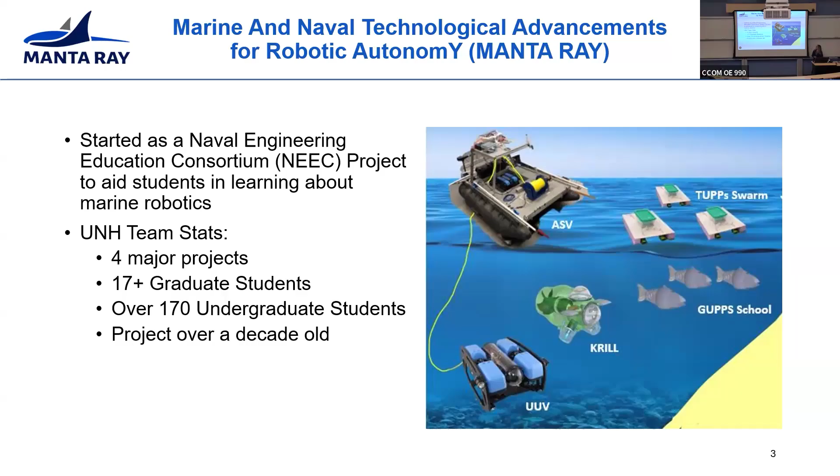And also to note, it's an interdisciplinary team. So we have students in ocean engineering, mechanical, electrical. We even have had marine biology students. So we're really getting an all hands effort on this research, which I will get a little bit further into on some later slides.

But MANTA RAY is also not the only group that Professor May Thein runs. She also oversees the Advanced Controls Lab, or ACL, who we occasionally collaborate with, where MANTA RAY focuses more on marine robotics. So you have underwater robotics, surface robotics. The ACL then oversees your

ground, air, space robotics. And Professor Thein's overall dream is to have friendly Skynet, which I always laugh about because Skynet's usually the bad guy, but we want it to be friendly. So we want this cohesive network of all of these different robotics throughout all of these different domains. And there's a lot of graduate students conducting research to accomplish all these goals through all of these domains.

So for MANTA RAY alone, even just with our UUV research alone, you have my perception research going on, you have optical underwater communications going on with Derek's research, and also our master's student Seth. We have pitch control being looked into for the robotic fish by Maggie, or reinforcement learning research by Alex, one of our systems design PhDs.

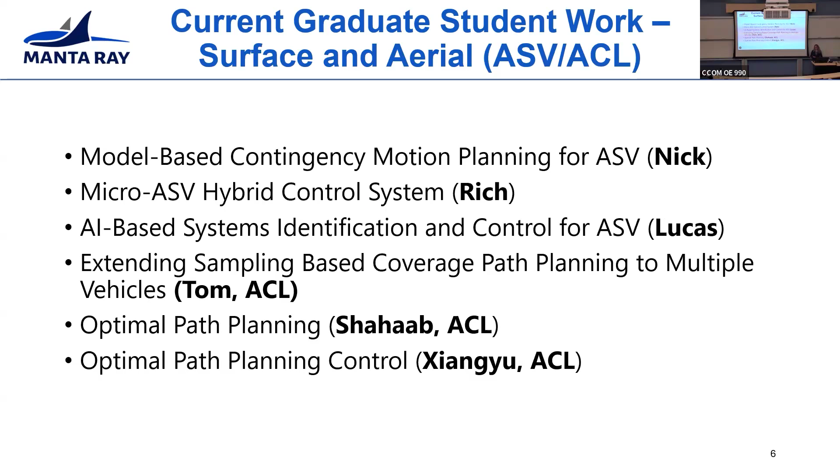And for autonomous surface vehicles, we've looked at model-based contingency motion planning, micro ASV hybrid control systems, and some AI-based systems identification, along with then going into the ACL, looking more into your path planning and controls research as well. And then for the vehicles for this research, which is where the undergrads come in because they are the ones developing these vehicles, really fine-tuning them over this whole decade-long program.

We have this network of an autonomous surface vehicle, or ASV, which is the Orca in the middle, a pontoon-style ASV, which then handles all of the different uncrewed underwater vehicles, or UUVs, in our fleet. We have the Krill, which I unfortunately won't talk much about in this presentation, but if you have questions, it's an experimental vehicle from NUWC Keyport that can be tethered to the ASV.

We have our Blue Robotics BlueROVs, specifically heavy configurations, which can be run from the Orca ASV, along with our robotic fish. So we have this network of vehicles to then apply our research to, and for this whole presentation, we're going to focus on this perception research.

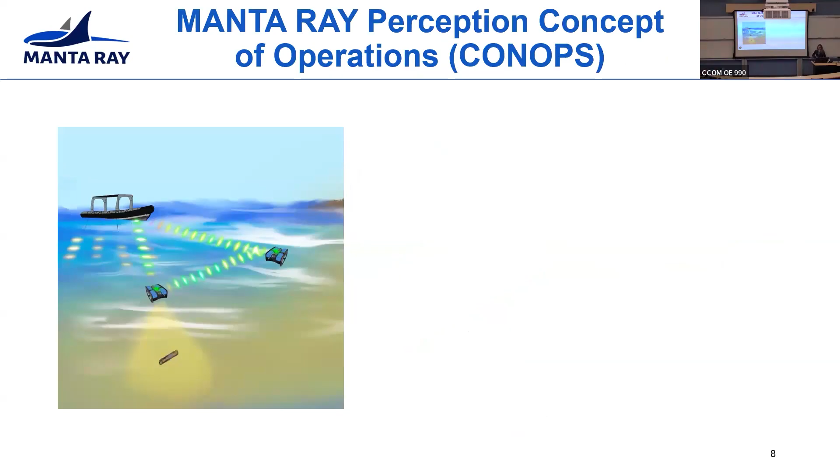So while my research is looking at developing the algorithms for perception, Maggie's GUPPS research was looking at a vehicle to deploy that perception, and Derek's communications research is looking to communicate that. So our general concept of operations here is to deploy all of these UUVs from some sort of central location

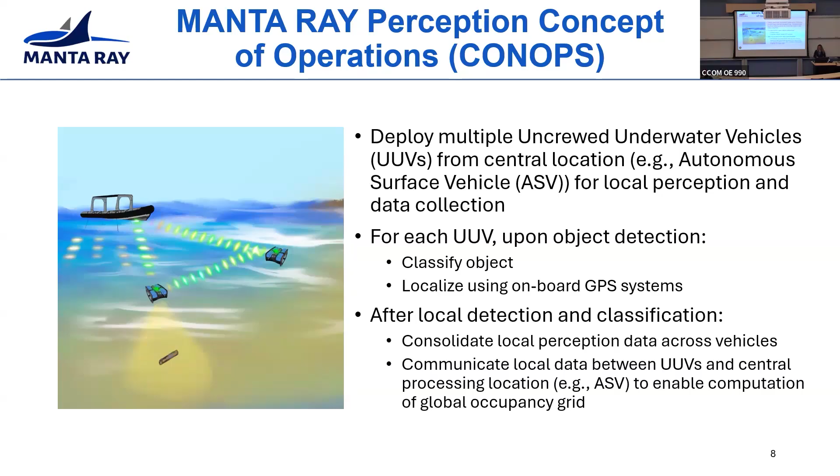So I'm just going to now dive right into that research with GUPPS, which, like I said, this was Margaret, or we all call Margaret Maggie as well, and I think most of you in this room know Maggie, who finished her thesis at the end of last semester, which was MS in Ocean Engineering, where she was focusing on the pitch control for our GUPPS robot.

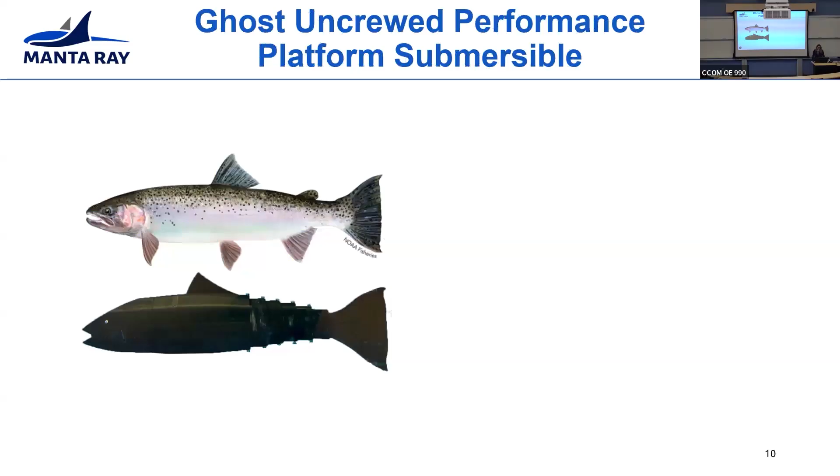So GUPPS itself is a robotic fish based off the steelhead trout. We chose steelheads to model it off of because of the Aquafort program here at UNH, where we have sustainable aquaculture research happening right off the coast of New Castle. So what a good motivation to design this robotic fish on. And we've been printing it in-house using PETG and TPU filaments. So PETG is the majority of the fish, where the TPU is the caudal fin, or the end of the tail. So it's a little bit more flexible.

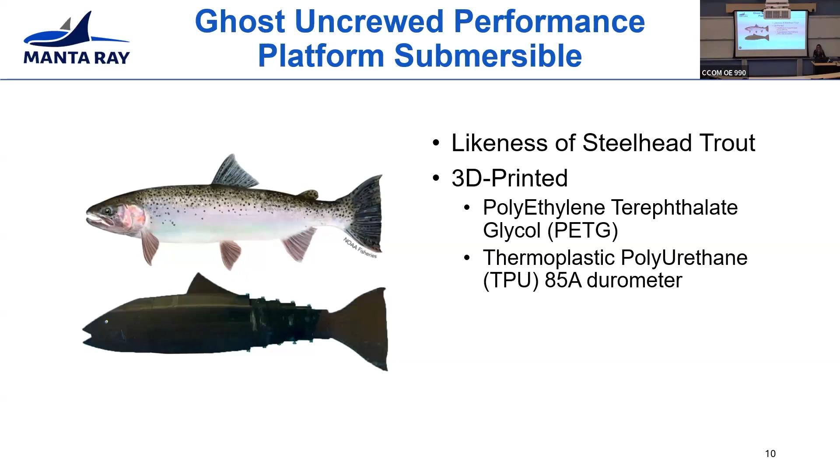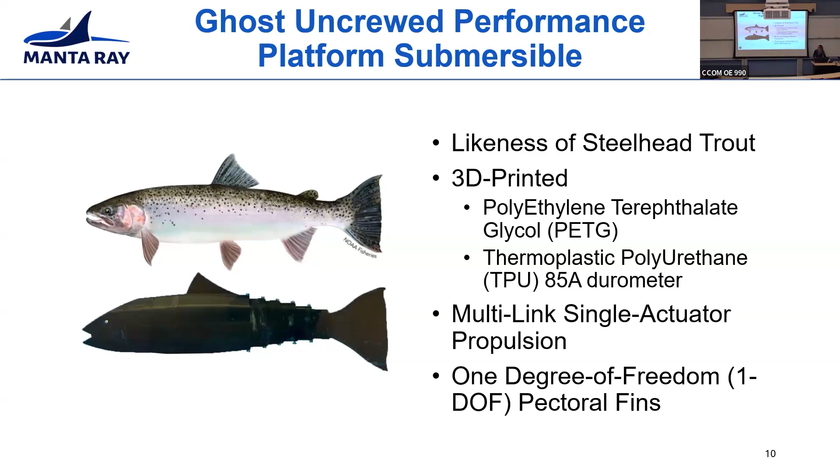It's using a multi-link single actuator propulsion method, and it has 1 degree of freedom, or 1 DOF, for its pectoral fins towards the front of the fish. And GUPPS will be used as a dynamic perception array. So we're looking at using several GUPPS in a multi-node configuration, with each having a perception sensor package on board. So that package would include perception sensors like your cameras and sonars, and then your ambient sensors as well, looking at data points like temperature and salinity.

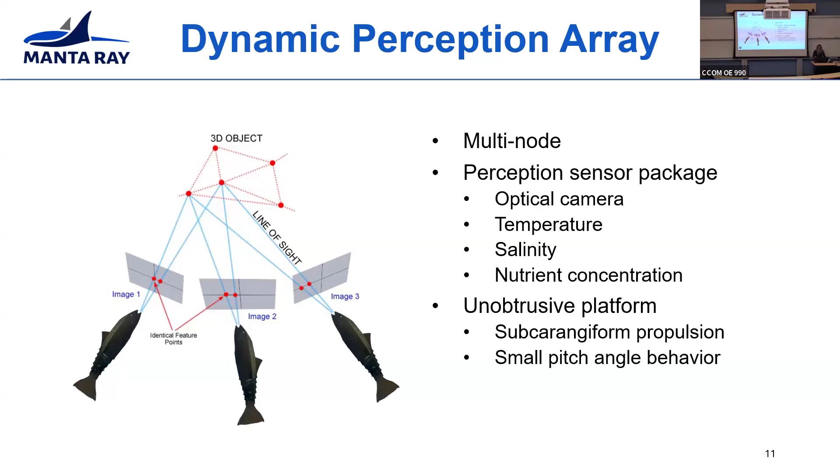And it's meant to be unobtrusive. So we're modeling GUPPS after the steelhead trout, so it blends in better with its surrounding environment, using similar propulsion to the steelhead, so that subcarangiform propulsion with that small pitch angle behavior. And subcarangiform is a fun word to say, and that's really looking at the biological part of GUPPS. So that's where a lot of the biology research comes in, and subcarangiform is just the class of fish we're looking at. So that's including trout.

And you can see, because of how the servo is configured within the body of GUPPS, so the servo itself is kind of mounted at the middle of the body, and it's a rod-driven system where the rod is connected through this piece. We can get this kind of sinusoidal motion, which is mimicking the subcarangiform propulsion we'll see with the steelhead trouts.

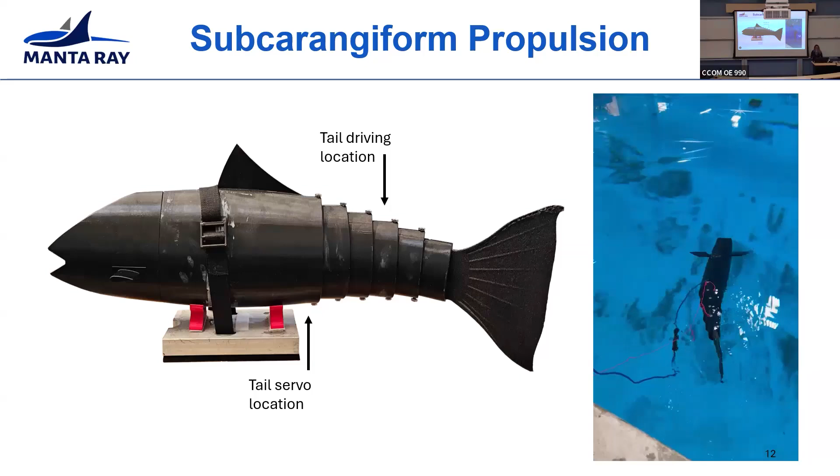For the pectoral fin, the pectoral fin started not very biomimetic, where it was based off of a NACA airfoil, which was very lovely for simulation modeling, since there is a lot of research on NACA airfoils. Unfortunately, because of the size of the fin, even though it was similar to what you see ratio-wise in nature, it was not forcing the body of GUPPS down as much. So over time, the design became a lot larger, but also still became more biomimetic in a way where we were modeling closer to a fin that you would see on a fish in the wild, especially with the ray design on it. So it is just interesting to see how we go from a NACA airfoil all the way to this more biomimetic design at the end.

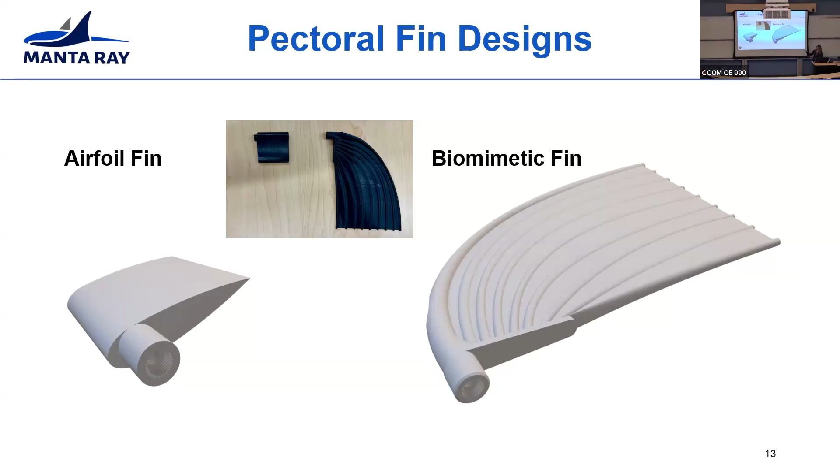And then all together with the pectoral fin inputs with how that tail is propelling GUPPS throughout the water, then we can look at how the pitch of the fish itself can be adjusted, which is what Maggie was looking at mainly, was that change in the angle of attack of the pectoral fins, or AOA, and how it would change that body pitch angle.

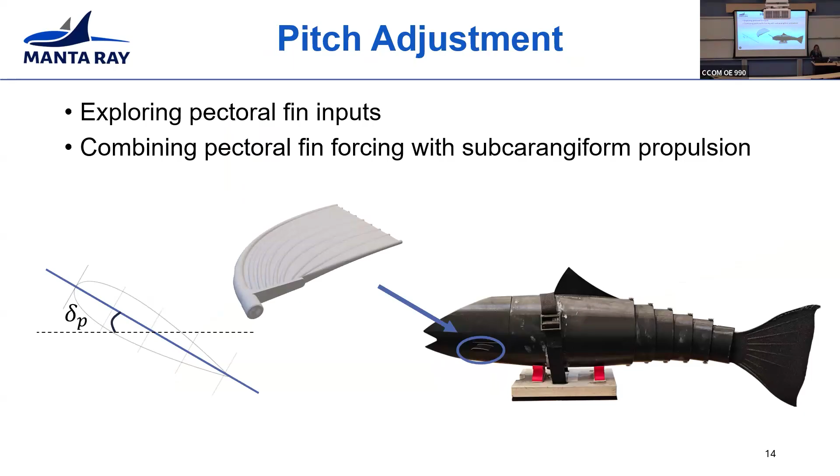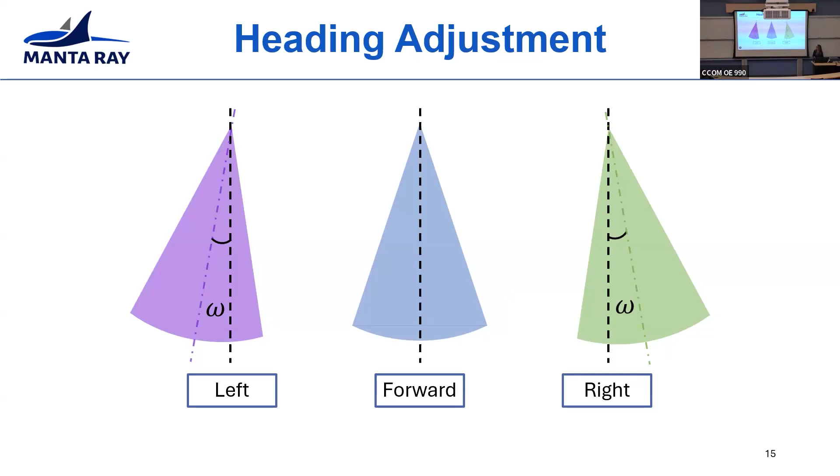Also for the heading of the fish, the yaw could be adjusted by changing the axis of the caudal fin. So the line of travel for the fin itself is oscillating, and it creates a net zero force propulsion. So the flick of the tail does one cycle, and that cancels out with forward movement. To change that yaw, you have to change the center of axis for the caudal fin, which is at omega. For this research, we were just looking at forward propulsion, but future studies could definitely look at then changing that yaw angle as well.

For the actual guts of the fish, everything was packed in a Blue Robotics pressure vessel housing, where for the sensor systems on board, the inertial measurement unit being used was a Berry IMU 6 degree of freedom sensor, and then a dual pressure sensor configuration, which you can see in this image here, was also implemented by putting two Blue Robotics Bar30 sensors, one on each side of the pressure vessel.

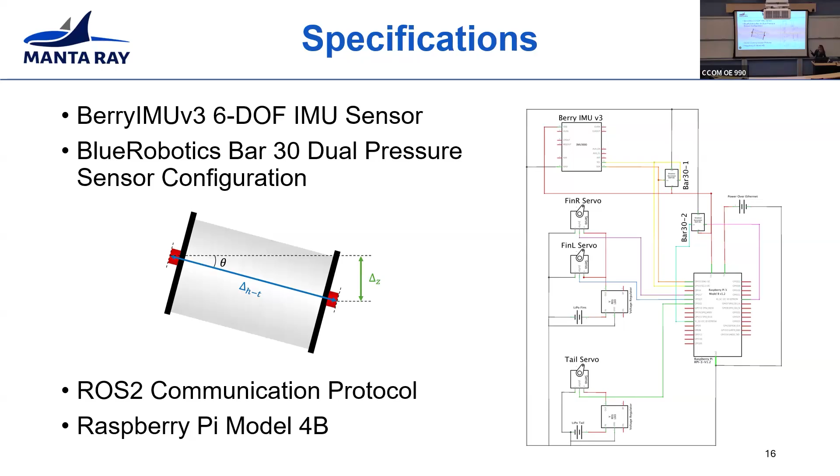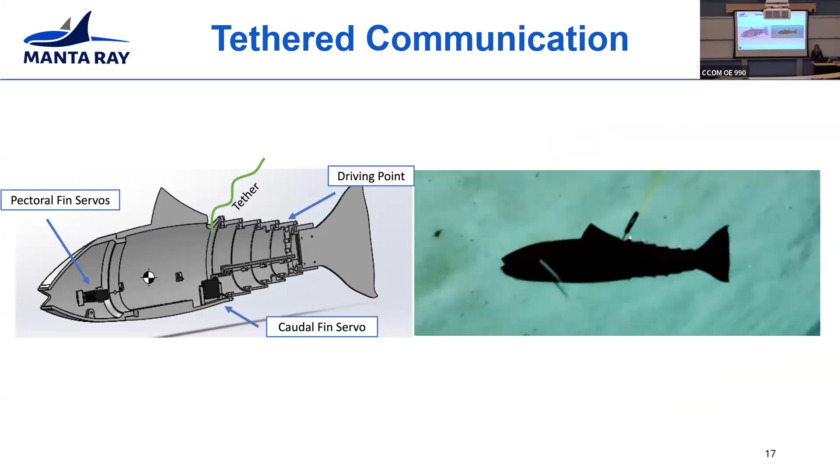The actual communications for GUPPS were handled using the Robot Operating System 2, or ROS2, all handled on a Raspberry Pi Model 4B with the electronics diagram as you can see here. Communications itself were done via tether to a shore station, so a laptop on shore somewhere. So we were able to have user inputs go into GUPPS via a graphical user interface, or GUI, to real-time control the different angle adjustments for the pectoral fins, for the caudal fins, and so on.

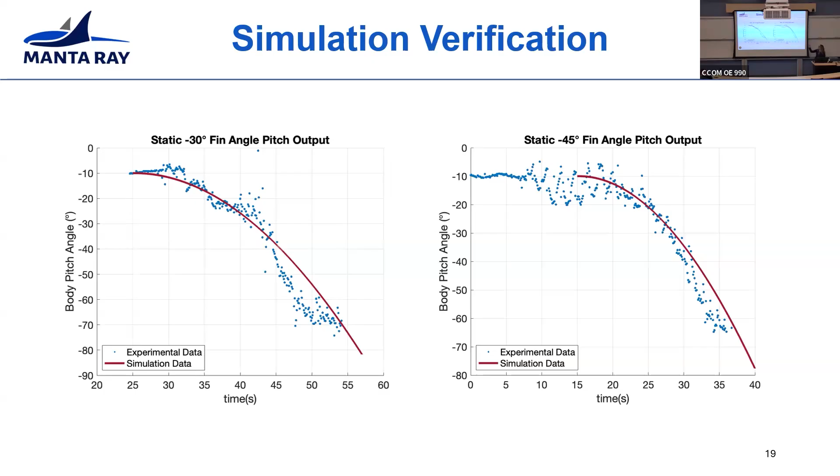These were the simulation versus experimental results for static pectoral fin testing, which was published in her IEEE OCEANS Brest publication, where the fins for GUPPS were statically set at two different pitch angles, here -30 and -45 degrees. And you're able to see how the body pitch angle of GUPPS lines up pretty well with what was simulated using that Simulink model.

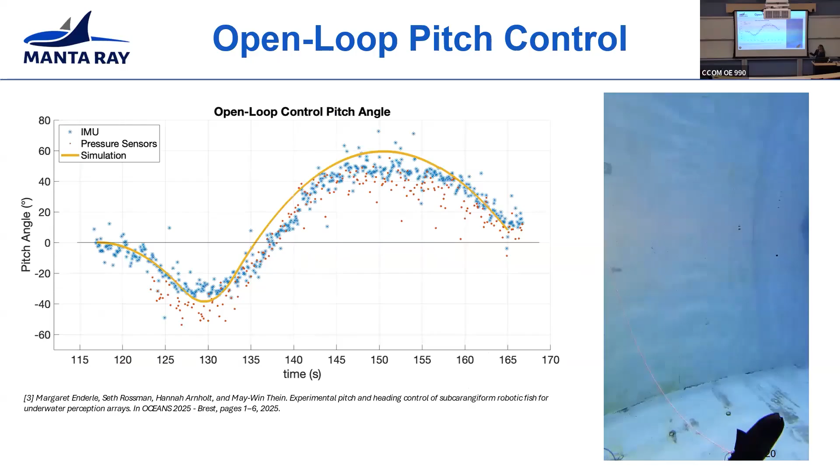And then also, Maggie was able to verify an open loop pitch control, also presented in that Brest paper, where we got the simulation output and we're able to compare it against the actual experimental. And you can see these results were from this test here in the video, where GUPPS is descending, then ascending, and then descending again. And it's cool because you can actually see the fish kind of swimming through the water column. So I'll let you all watch this for a sec.

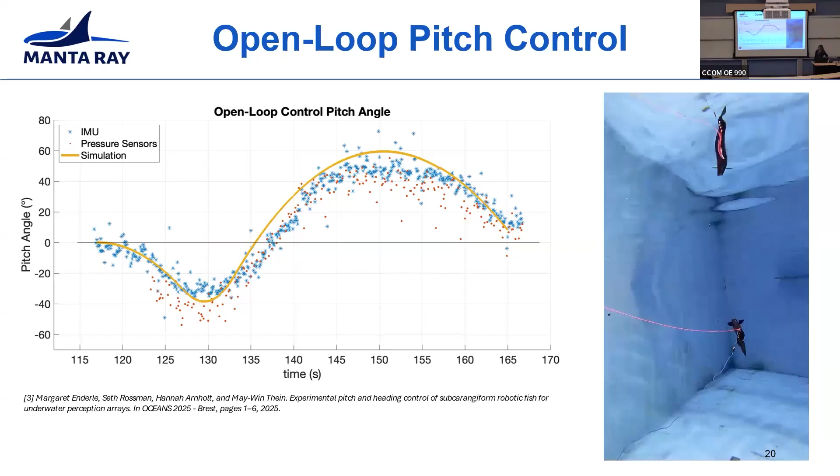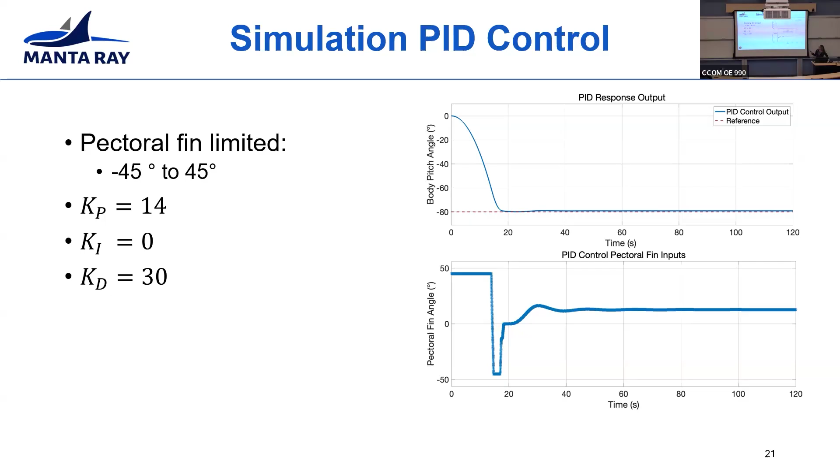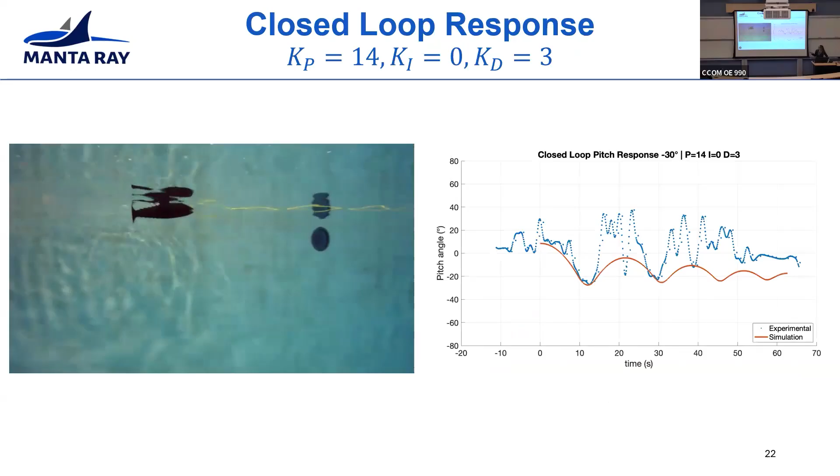The final study Maggie conducted was implementing a PID controller on board GUPPS. So she was able to simulate the controller itself and then experimentally validate again. These were the inputs that were used, along with the pectoral fins limited between -45 to 45 degrees. This was the controller pectoral fin input with the response output as seen here. And again, we're able to validate those simulated results with the experimental, and the video for this trial here can be seen here.

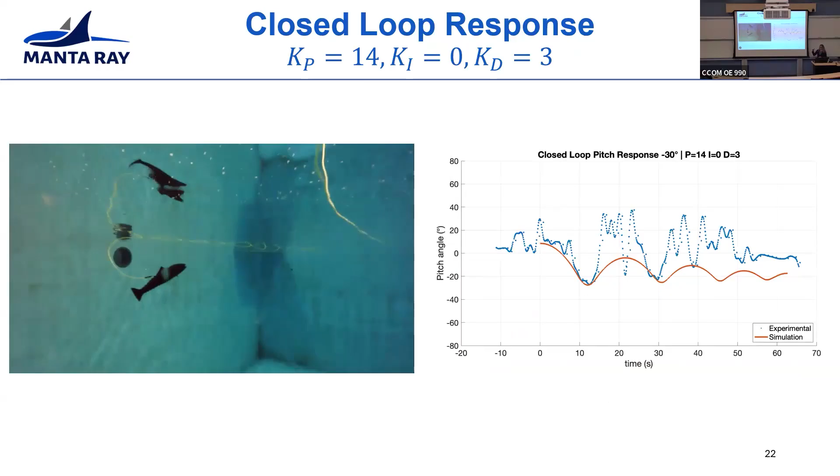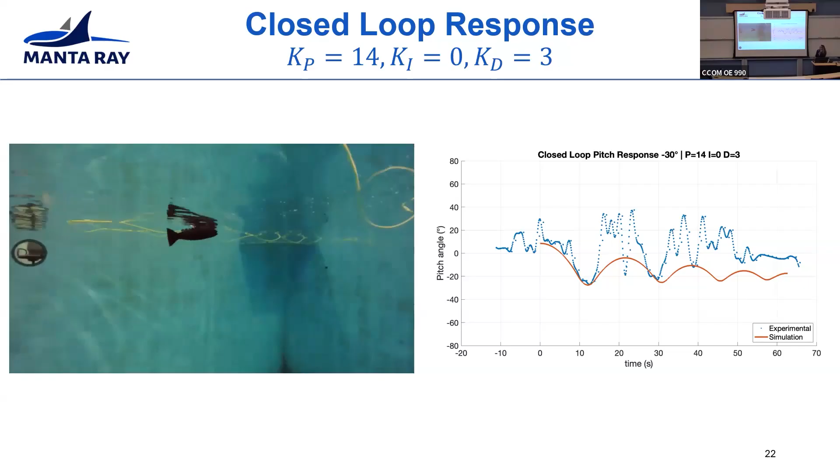And to note also, these results don't look as clean as the last ones because GUPPS starts so close to the surface. The model itself was not accounting for those surface effects, which is what explains this noise that you can see here. And Maggie discusses that a little further in her thesis. So I can also refer anyone to that if they're interested.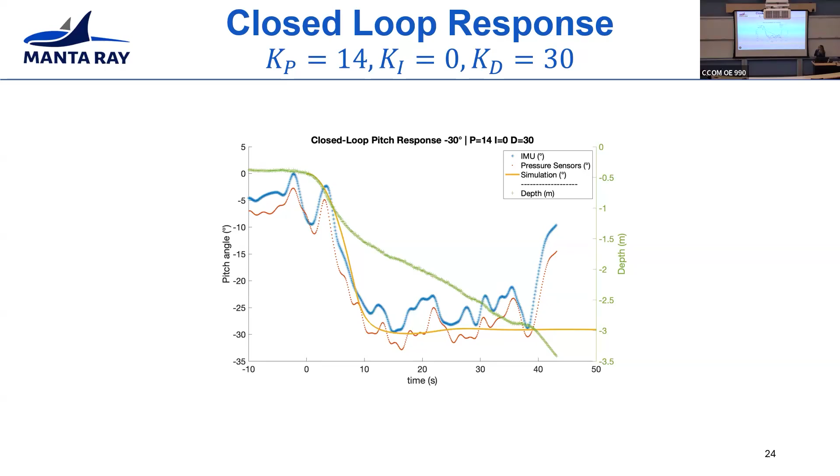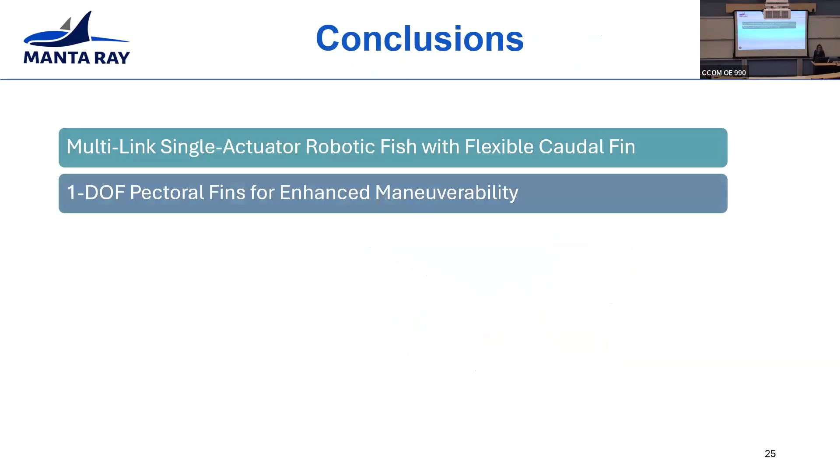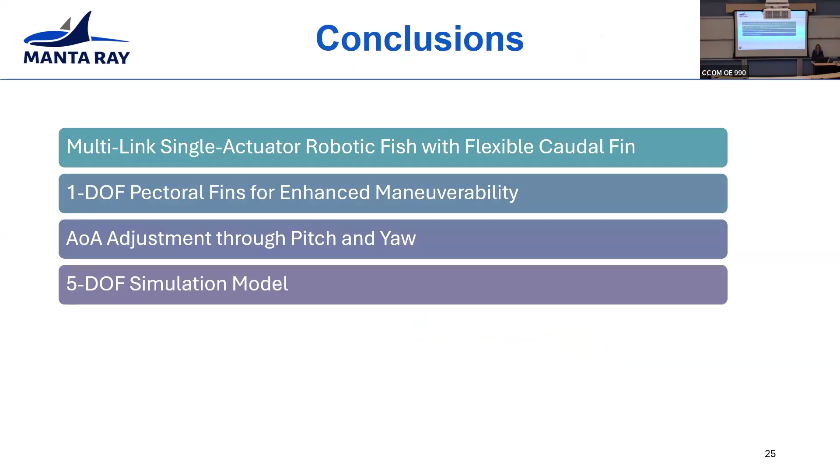So to conclude this master's research on GUPPS and hopefully frame future studies on the next slide, we've presented here this multi-link single actuator robotic fish with a flexible caudal fin with 1 degree of freedom pectoral fins for enhanced maneuverability. You have your angle of attack adjustment through pitch and yaw. Maggie developed a 5 degree of freedom simulation model using Simulink, and verified that model using static and open loop control tests, and also implemented a closed loop PID controller for her pitch control.

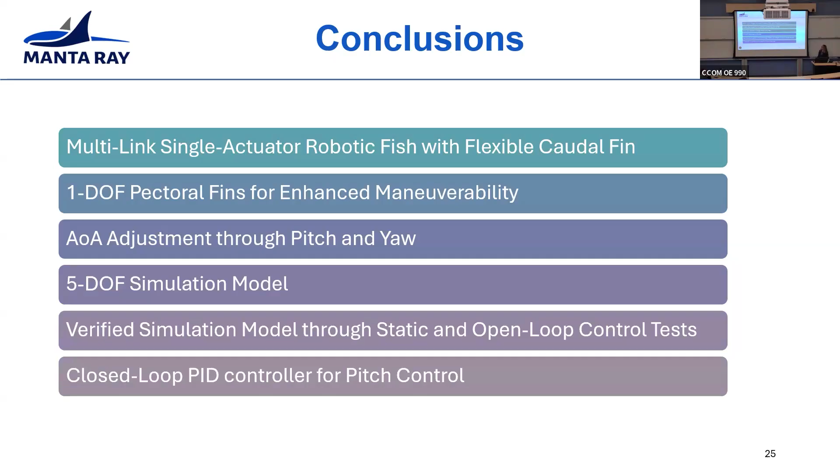So moving forward with this project, because we really don't want to see this GUPPS research lost, and it's hopefully going to be implemented for some of my research, we'd like to expand the PID controller implementation to heading.

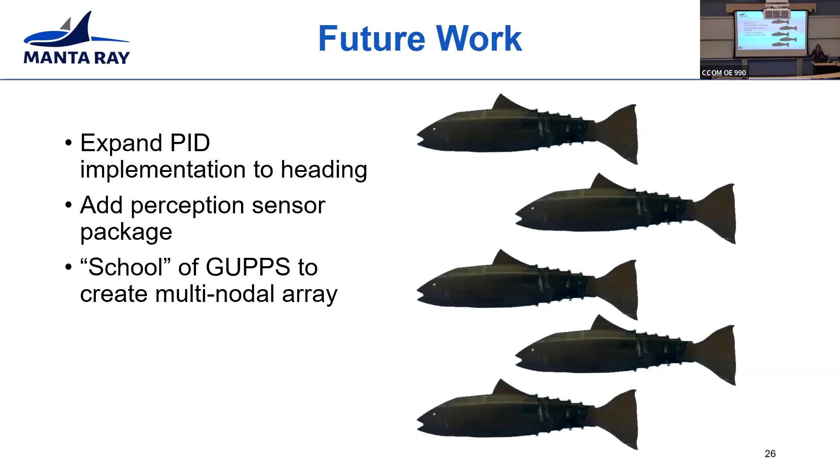Add the actual perception sensor package, as this research has mostly been looking at that control aspect of GUPPS. It's really important for the perception research to really have an understanding of the orientation of GUPPS in the water. So that's why we've spent so much time on it, but it'd also be nice to start collecting some perception data using the fish, and then also create a school of GUPPS so we can have multiple to create that dynamic perception array. And then these were a lot of Maggie's references.

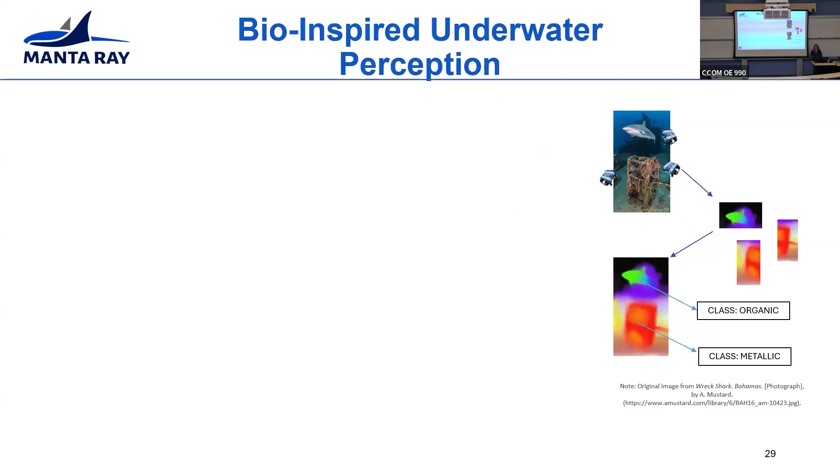So then going into now my research, which is the Marine and Naval Techniques for Integrating Sensing, or MANTIS. So why do we have these vehicles? One purpose is to collect perception data, as I've said a lot so far. So I'm focusing on bio-inspired underwater perception, using an n-dimensional approach, leveraging different sensor types. I mentioned it earlier in the GUPPS sensor package. For that, we're talking about sonar and camera. For my research, even adding on other sensors like magnetics, and also leveraging those different viewpoints.

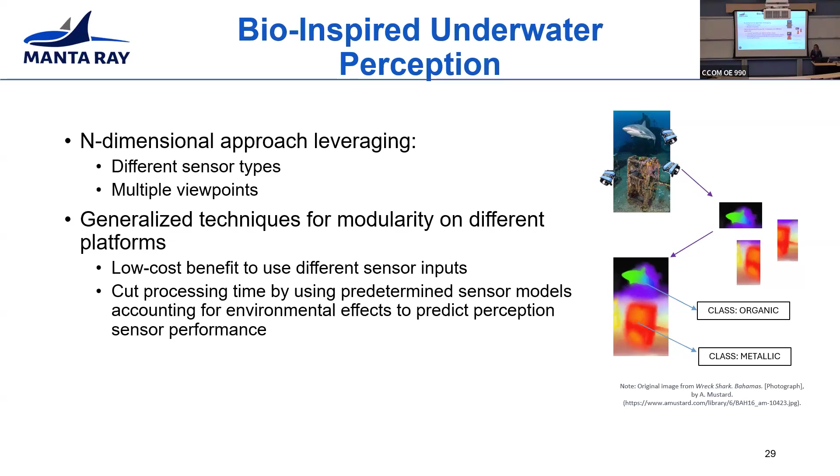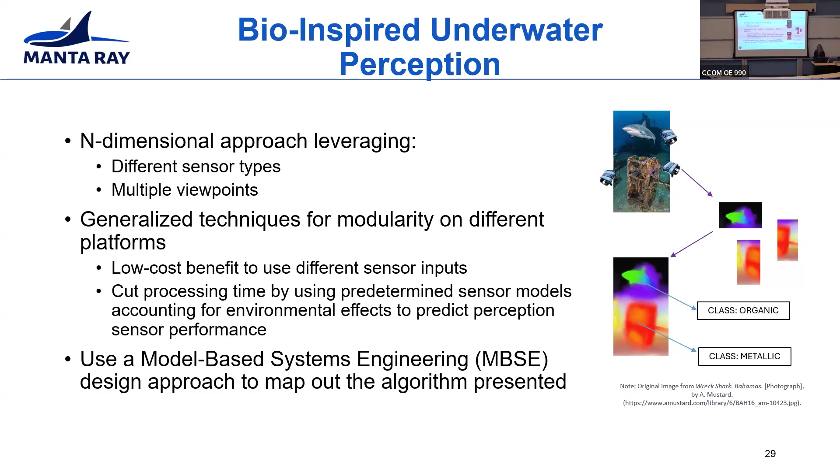And trying to generalize these techniques for modularity, so you can help with cost. So you're looking at putting this on different vehicle types. You're looking at using different sensor types, even different redundant sensor types. So using a low-cost sensor maybe in one package versus a high-cost sensor. And then also cut processing by having an understanding of how your sensors work in different environments, so you have all of these predetermined models that you can implement later on, hopefully, with the end result, cutting processing time. And then I'm also using a model-based systems engineering approach to map out all these different algorithms and capture them accordingly.

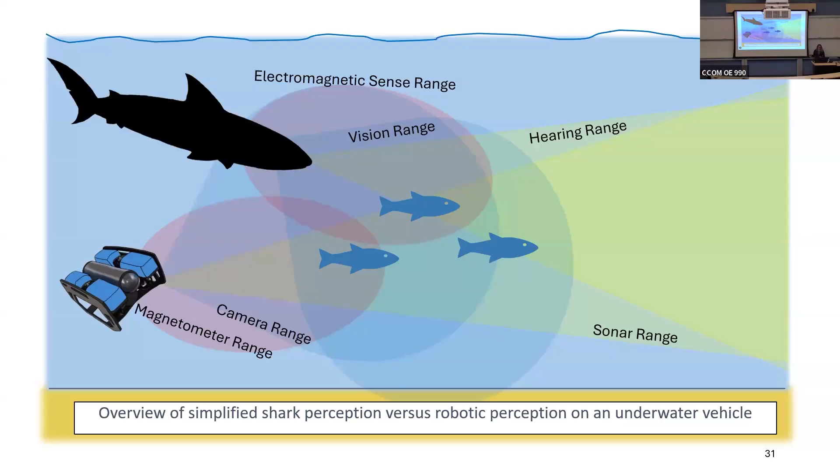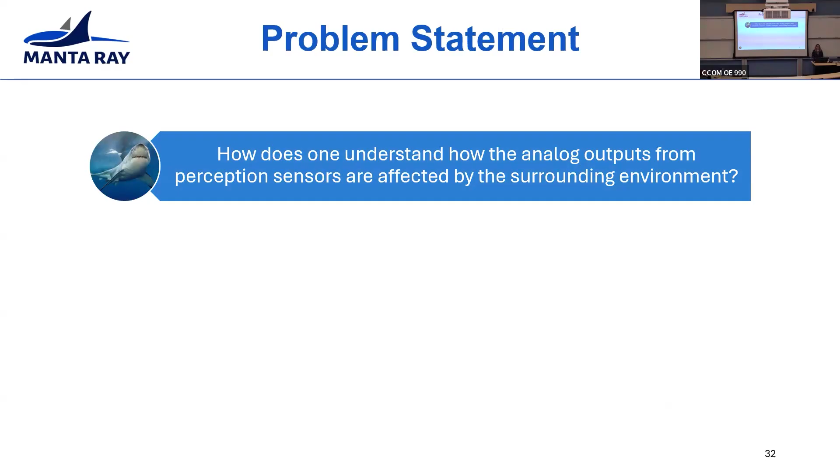So to break this down, I've isolated a couple of problem statements to really start diving into all of this. The first one is, how do we actually understand those analog outputs from our perception sensors and how they're affected by the surrounding environment? So for the shark, if it's in a really turbid environment, maybe it knows it can't trust its eyes as well because there's a lot of sediment through the water column. So maybe it will depend more on its acoustic senses or magnetic senses and so on.

And then how can we leverage these performance models to unify the data together for that object detection and classification? So when the shark's in that turbid environment, how does it say, I can't really trust my eyes, but I see a blob there, and then I'm getting this sound and this magnetic signal too. So how do I put this together and say, oh, I think that's an injured fish, I'm going to go after that.

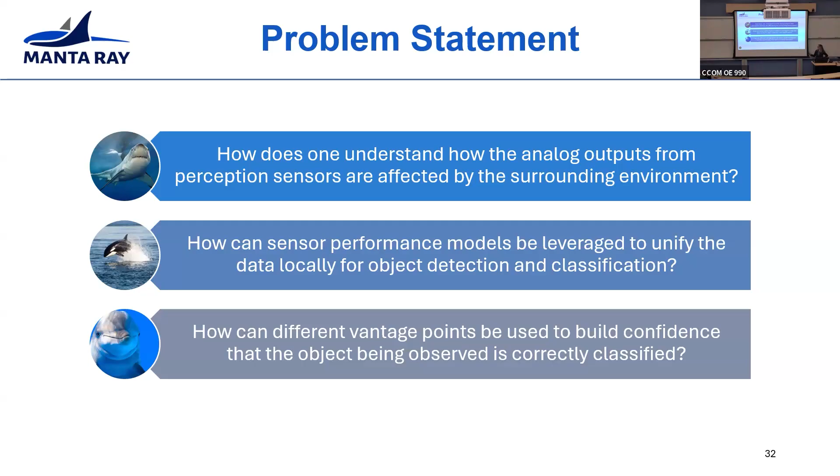And finally, how can different vantage points be used to build confidence that the object being observed is actually correctly classified? Say you have a pod of dolphins and they're all working together to hunt something. How do these dolphins communicate to say, okay, this is what we're looking for? For today, I'm going to just focus on the first two pieces of this problem statement, but this third problem statement is what I'm working on for future studies with my research.

So for the first problem statement I presented, we're looking at our sensor performance model, and this is where my standardized heuristic algorithm for reinforced calculations, or SHARC, comes in, where I've developed this algorithm to capture modeling the ambient environment around the sensor and how the different sensors behave with it. And then incorporating this into a type 2 fuzzy logic algorithm, the weighted heuristic algorithm for localized entity evaluation, for handling all of this information together. And then I'll present today an application to a real life scenario of swimmer search and rescue, which we presented at Oceans Great Lakes last fall.

So to dive right into things, for the sensor modeling, an overview of SHARC: it's a 3-phase algorithm where you first have to identify the sensors you're using, so your ambient package and your perception package. So if we're modeling a sonar, we're looking at probably a CTD package for an ambient sensor. And then assessing the performance.

So again, for that sonar, what are our predicted echo levels? And then also, how can we use those to get our probabilities of detection? So using a mixture of simulation and experimentation to get that data, and then eventually apply it. So when I modeled SHARC, it was in my publication for Oceans Halifax.

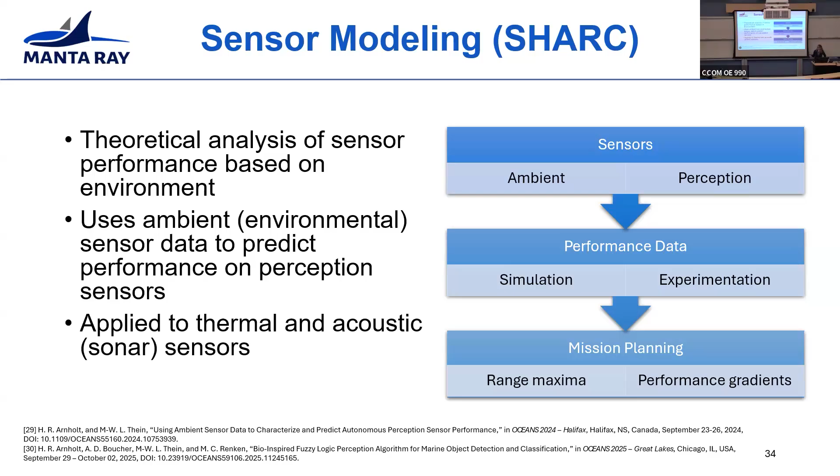But then for Oceans Great Lakes, we were looking more at implementing it into WHALEE, which I applied to not only an acoustic sensor, but a thermal one. So for the Great Lakes paper, I was looking at a Blue Robotics Ping 1D sonar along with an MLX90640 thermal camera. And we were able to model the performance data, so get those predicted outputs.

So as I said, for the sonar, we're looking at the echo level. For the thermal camera, predicting what temperature would be radiated away from the camera. And then also using those to determine our probability of detection, which were then able to be input into our WHALEE membership functions.

I'm not including the models just for time's sake, but for the sonar, it was a mix of the sonar equation as well as using Michael B. Porter's Bellhop simulation to model the transmission losses through the water column. And then for the thermal camera, I was able to use some thermodynamic relations to assess the range. So if you're interested in those, we can talk about it later on.

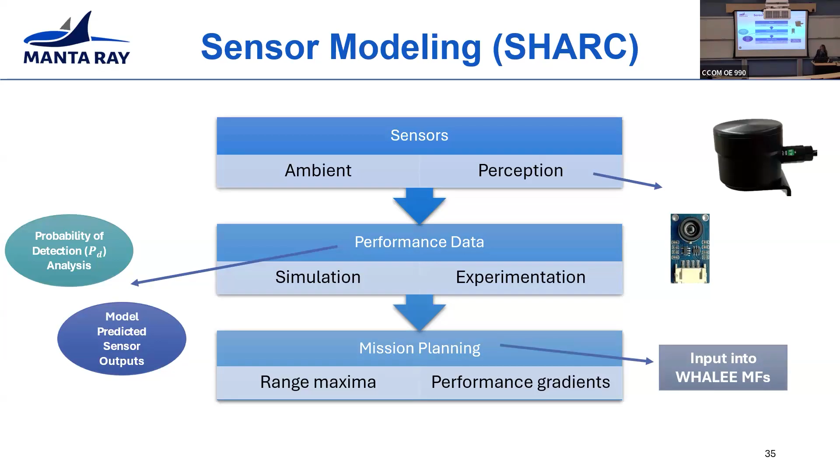But getting right into the WHALEE algorithm, which I said is a type 2 fuzzy logic algorithm, how that works is you have these membership functions, which for type 2, you have these field of uncertainty bands. So that's actually taking those probability of detections, in this case modeled from SHARC, to determine those bands. So the higher probability of detection you have, the smaller those bands get because you're more confident in your results.

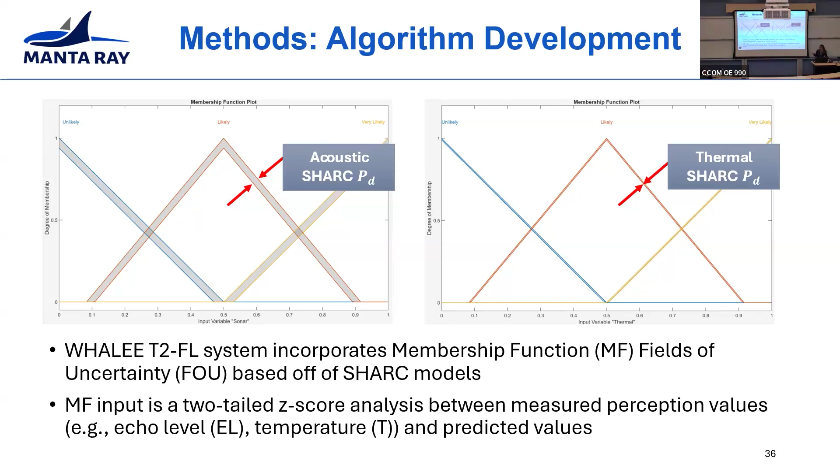But the less confident you are, the more that field of uncertainty will grow because you're just very uncertain on results. And then for the actual inputs, we're going to take those predicted values, so the predicted echo levels and temperatures, and compare them to the actual experimentally collected ones using a two-tailed z-score analysis to go into the inputs.

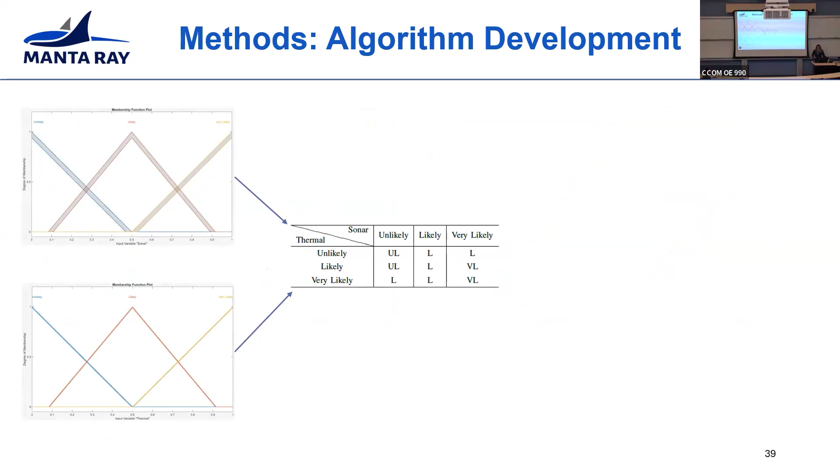where we can determine what confidence we want to use as our classifier. So here we were using a value of 0.8 or higher. If we got a crisp output of that, then we said, okay, this is our swimmer in our environment.

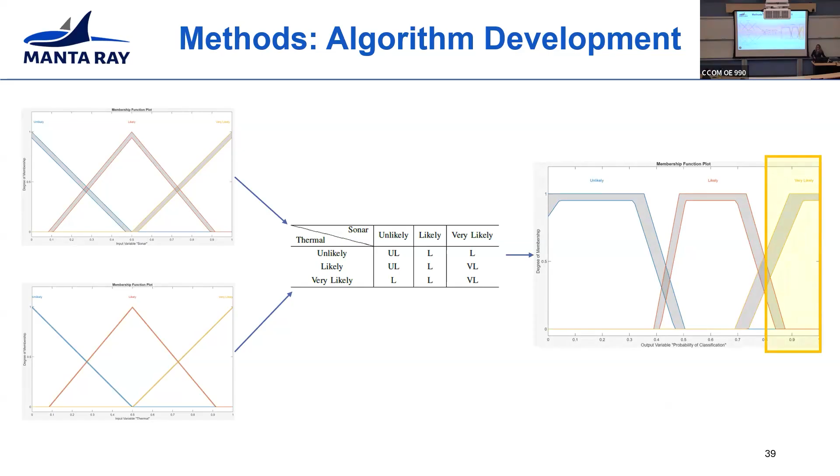Then in my research, WHALEE would be performed for every target within a frame of discernment. So one limitation of my research is that you have to assume every target you define is the only one you know in your system. And that's just for the sake of scope for my research itself.

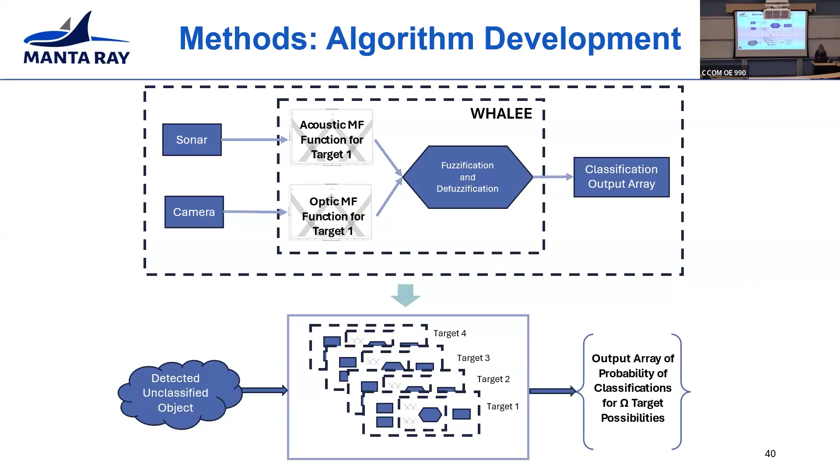In the case of the swimmer search and rescue, we were just looking at the swimmer itself and a secondary target, which I'll get into later on. And that was our whole frame of discernment. But in future research, we're looking to expand that frame.

And then for experimental validation, we used a micro uncrewed surface vehicle, or micro USV, right here in the Chase Ocean Engineering tank, outfitted with our perception sensors, so that sonar and thermal camera, paired with the complementary environmental sensors. And it was RC operated from a shore station, also using a ROS2 interface.

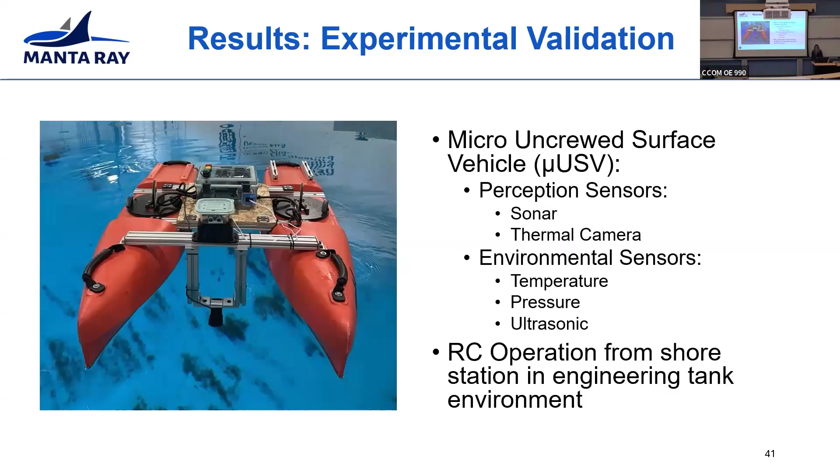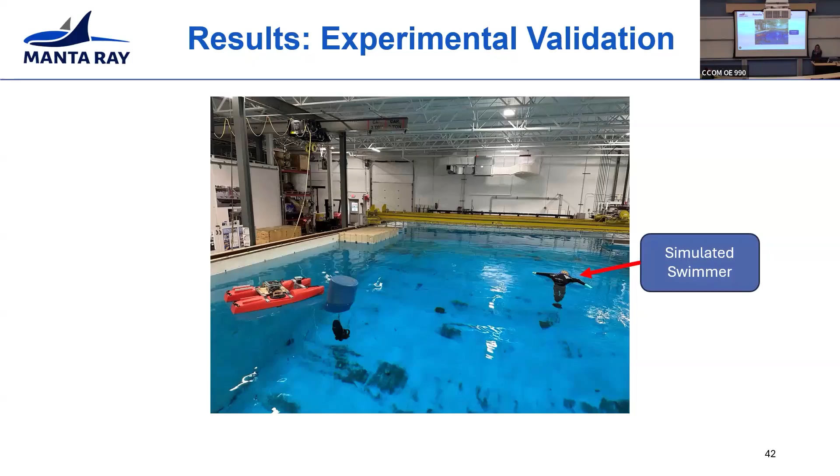And then the test itself was us driving the micro USV using a lawnmower pattern around random configurations of our targets. Our primary target here, the simulated swimmer, was a women's wetsuit filled with air-filled targets, with the head being a water polo ball with electronic hand warmers on it. And our secondary target here was just an air-filled drum, just to look for something else.

And then the results from the z-score analysis. I'd also like to note the Blue Robotics sonar, we ended up finding some challenges. We weren't able to get the actual analog decibel values from that. It gives more of a digital output, and unfortunately there isn't a way to convert from those 0 to 255 values back to decibels. So for this study, I just use a yes or no if we detected. For future studies, we've already acquired a new transducer, so we will be able to get those actual Z-score comparisons, but for the thermal, we were able to get the comparisons between our predicted temperature and our measured, which you can see here.

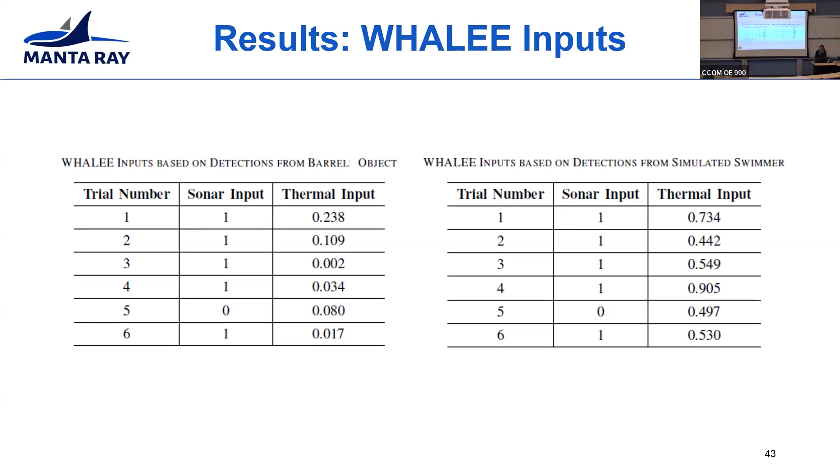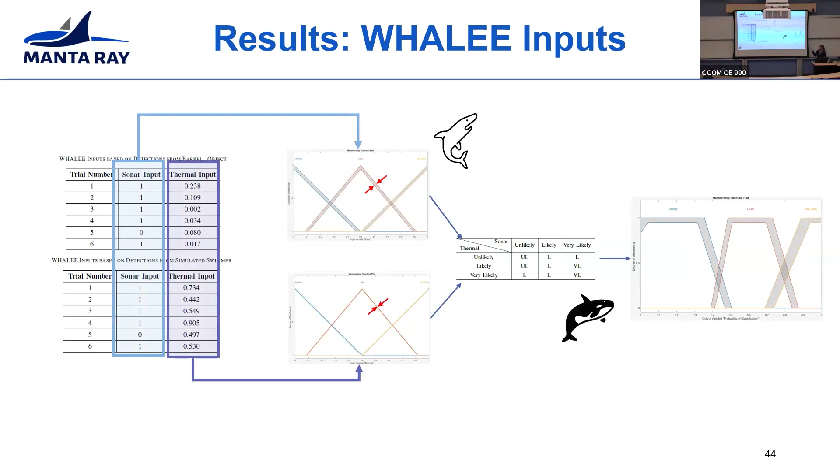And then these, again, just to remind everyone, go right into our WHALEE algorithm where the acoustic values go into our acoustic membership function, thermal goes into thermal, shark determines our fields of uncertainty, and then the rest of WHALEE runs to get our crisp output, which we can see here. So for all of the trials, we were able to detect both of the targets, so that simulated swimmer along with our secondary target. For 5 of them, we were able to also classify our swimmer using that 0.8 crisp output threshold from our defuzzification. And you can see the barrel was also detected, but did not make that threshold. So we were able to say here that that was not our swimmer.

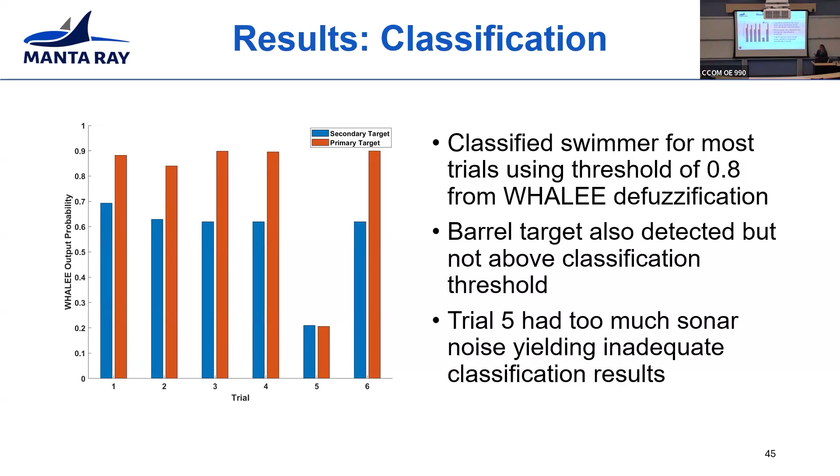Trial 5, while both targets were detected, there's too much sonar noise to actually detect it using the sonar. And because the rule set was so biased towards the sonar, even though we had adequate thermal results, we weren't able to get a detection. So that was kind of more of showing that's probably also what would happen in nature. If you weren't confident in one of your senses, then maybe you wouldn't get your full classification too.

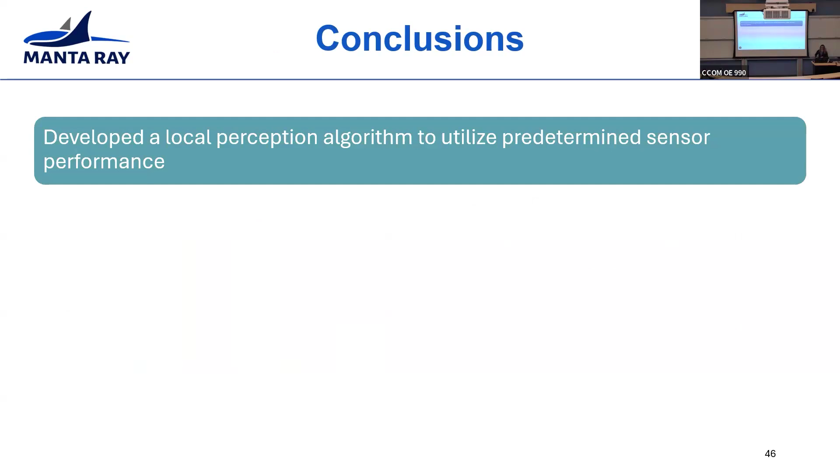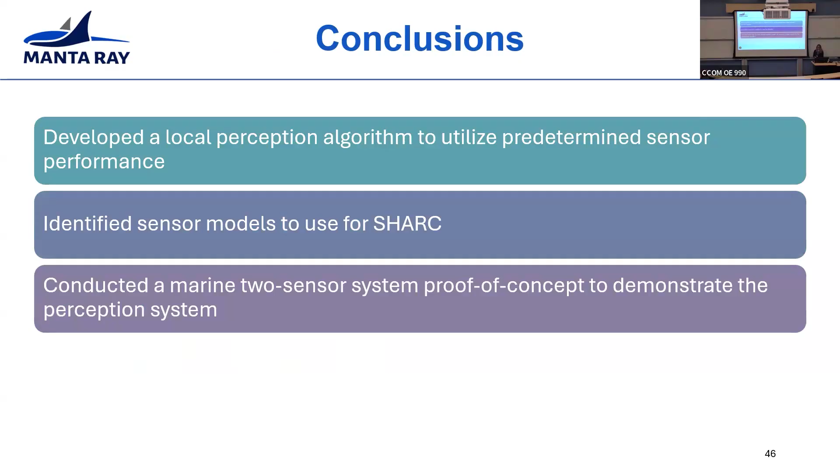So just some conclusions for my research. I was able to show the developed local perception algorithm to utilize some predetermined sensor performance and also identified some sensor models used within the SHARC algorithm. I also was able to show you all a 2-sensor proof of concept to demonstrate the system.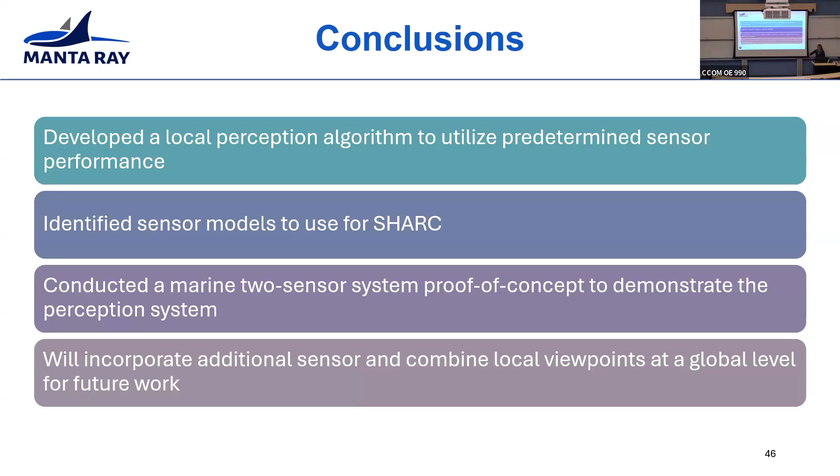And for future work, I'm also working on incorporating additional sensors, really bringing this underwater. So it was easier to do a proof of concept on the surface level, also just to get things going. But next stages would actually be taking things fully underwater, which means we won't be using the thermal model anymore. We'll be shifting to more camera model. And also starting to combine local viewpoints, so taking different perspectives from either the same vehicle or different vehicles and getting that global perspective. And these are my references.

Okay, now to end things off, I'll be going through some of Derek Perham's research. He's a PhD student in systems design, and he's been focusing on underwater wireless optical communications for underwater perception. So the purpose here is to really utilize the communication packet sizes to move perception information. And we're looking at optical also because it's a low cost version of communications. Acoustic comms can tend to be very expensive. So we're looking at alternative ways to really move this information, especially perception. You could be talking about large point clouds and so on, and that could require a lot of bandwidth.

And for the first stage of this research, looking at communicating all of the data to one central location. So, as I said in the beginning, in our concept of operations, communicating everything to the ASV or somewhere else in the fleet. But eventually we want to decentralize these communications and have everyone in their own individual nodes. So each UUV can perceive their own environment in real time. And then that real-time perception can be used for UUV controls development. So this could be used to develop or populate occupancy grids, and then the UUVs can learn about the environment better in real time, and know if there's an obstacle using those occupancy grids, and the cycle continues.

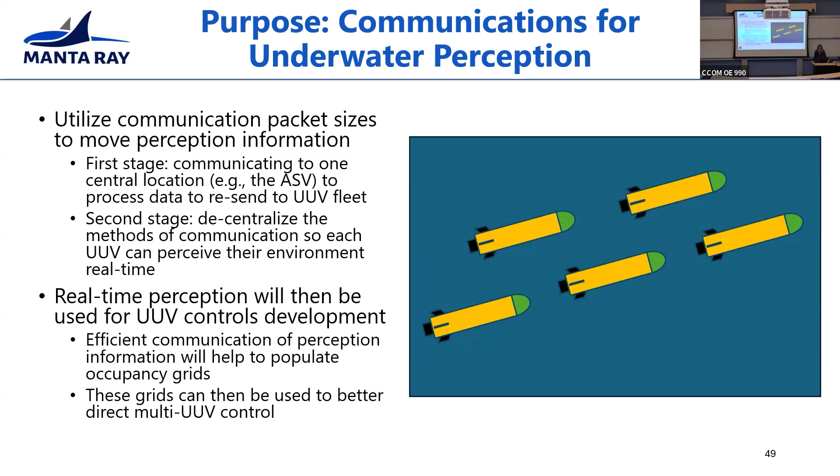Past research: a lot of this was based on a master's project by Igor Vladimirov in 2022, where he was looking to design a cost-efficient short-distance optical comm system capable of supporting formation control over multiple UUVs. His research was considering the transmitter and receiver design, especially with the receiver design, looking at the different photodiodes to use for that. He also was looking into digital signal processing, specifically with the packet structures and the signal to noise and bit error rates.

And then finally, he was able to test using simulation, and then also conducted some underwater testing right here in Chase, where he was looking at different LED colors, the distances between the transmitters and receivers, and the different angles between the transmitters and receivers as well for the optimal range, with those ranges looking between 15 and 20 meters. Again, clear water since it was just right here in the tank.

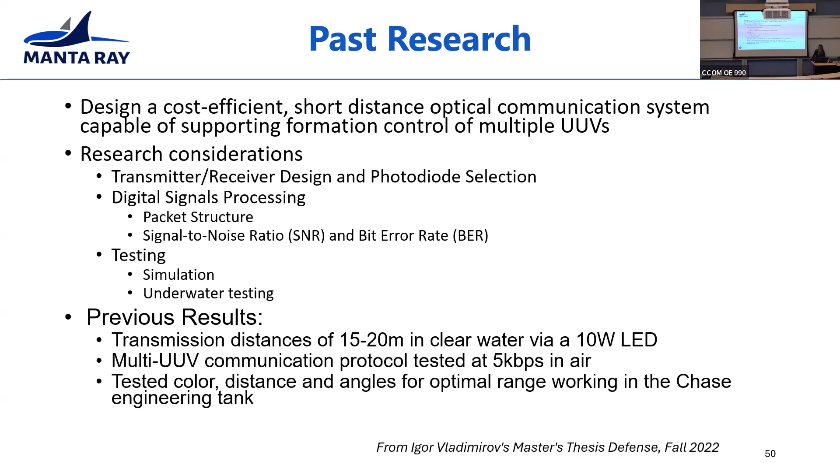And then he also was able to do some in-air communications testing for different nodes to mimic that multi-UUV communication, where I think he got about 5 kilobits per second for his air testing.

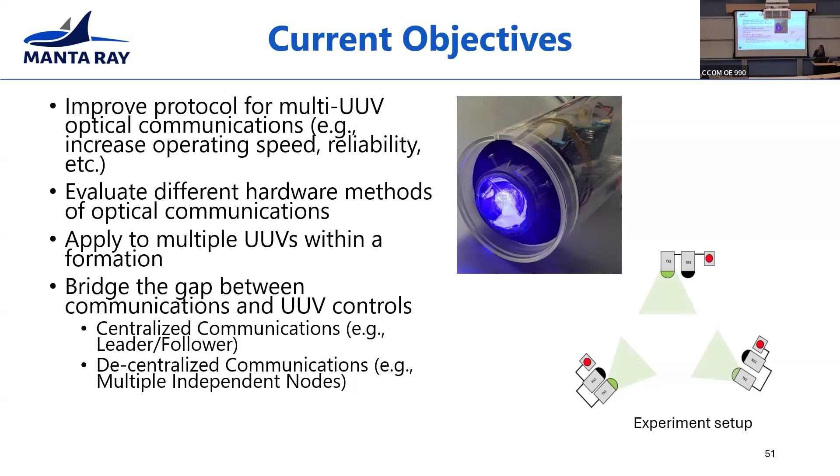The current objectives then are to improve upon this research for that multi-UUV communication, so increasing that speed, reliability, and so on. So to do this, Derek and other students in the lab have been evaluating different hardware methods for optical communications, and then looking to apply this to multiple UUVs within the formation, and then bridge that gap between communications and UUV controls, again, looking at the centralized versus decentralized and so on.

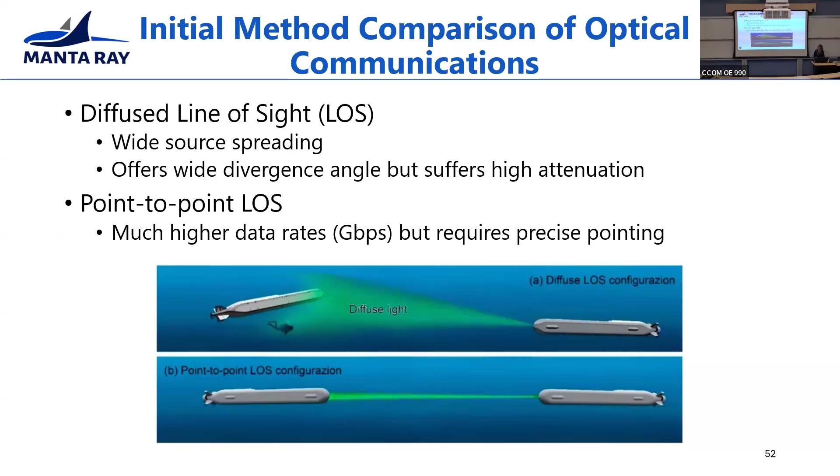Also, this research is looking at the diffused line of sight method. So we're using LEDs in the lab versus point to point, which you could use a laser for. The bias is towards diffuse because while point to point can have higher data rates, it requires much more precise pointing, so much more refined controls. So just to generalize the scope to start, they're looking at diffused line of sight.

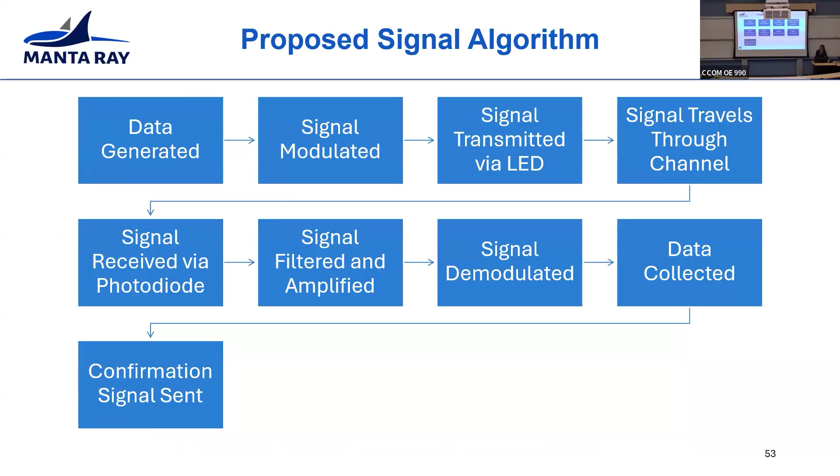This is currently the proposed signal algorithm that Derek's been studying, which he's also implementing using simulation within MATLAB, Simulink, and Simscape to simulate a real-world physical system using a physics-driven approach. And then for his actual signal modulation, and this is where things really start differing from Igor's research, he's looking into using a quaternary frequency shift keying approach, where you have patterns of 2-bit symbols tied to increased frequencies to allow for more perceived data throughput, where the actual data throughput remains the same.

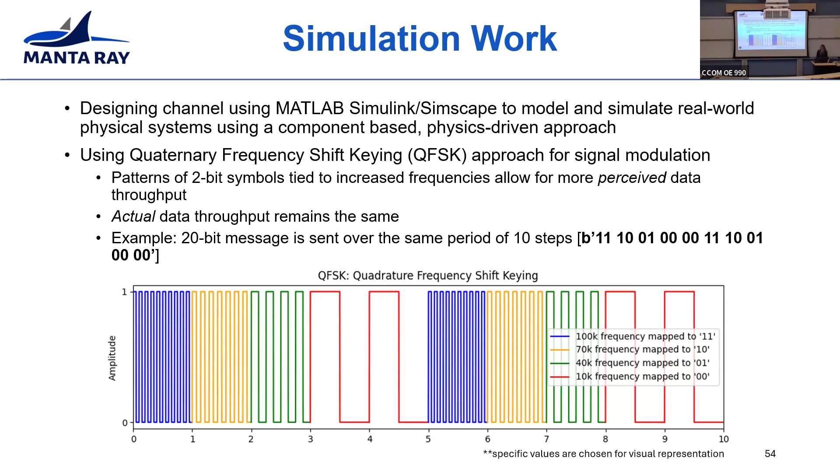And an example of this can be seen here. So this is what he's actually simulating using the Simscape environment. He's able to model the transmitter, which was designed considering the QFSK method, where the LED is a light source to transmit the signal. A Raspberry Pi is controlling the pins of the transmitter to flash a light, and a MOSFET is used to connect the LED to the power source. So this is based off of what Igor did in the actual hardware implementation of his master's research, moving that forward into simulation and eventually another hardware implementation.

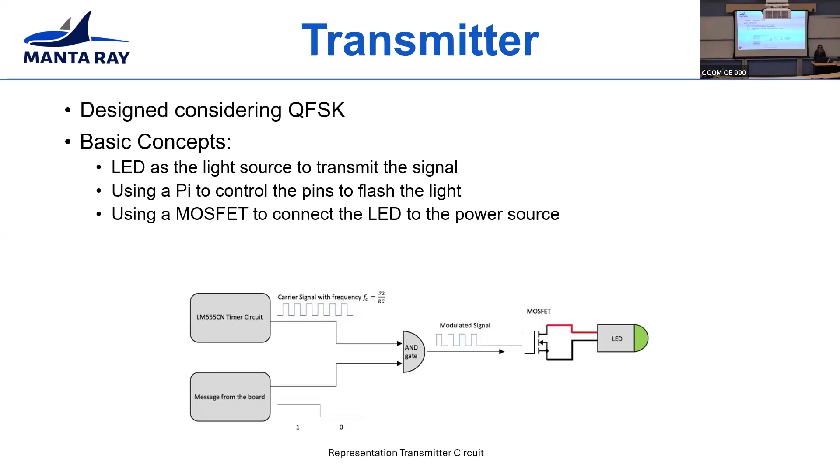And the receiver is a little more complex than the transmitter, where a filter is involved: that light source will go through a filter that has a readable window that's centered on the transmitted wavelength. And then that light will be captured by a photodiode to read the signal, and then the signal itself will be filtered and amplified to a readable output.

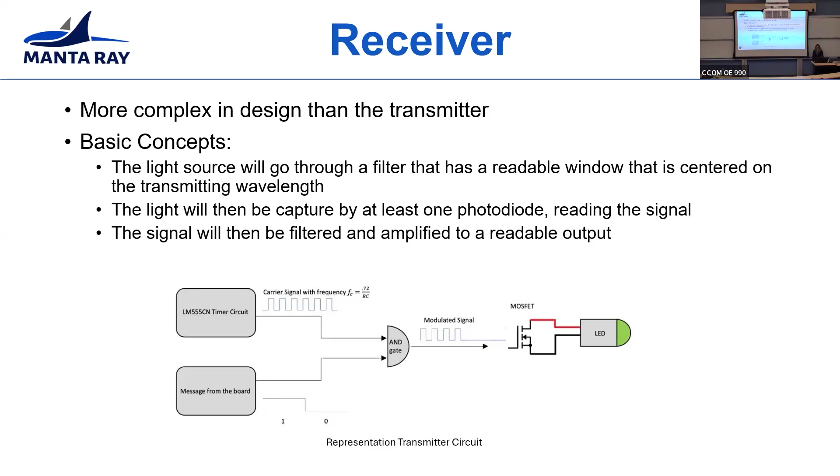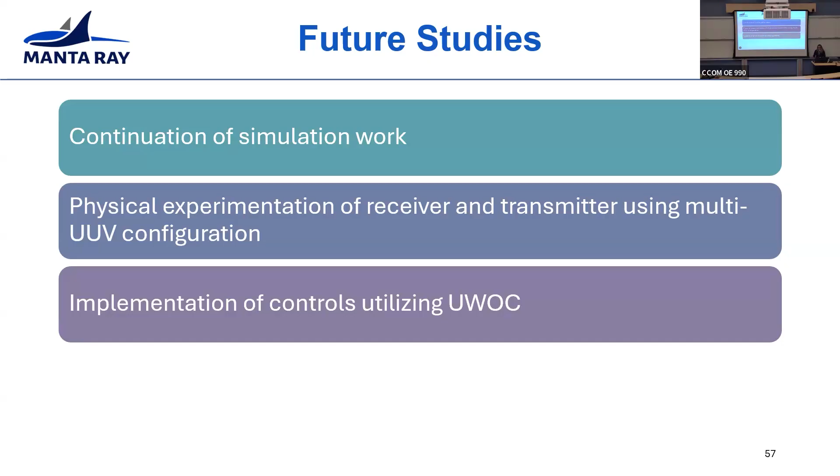And this research is a little earlier on, so there isn't as much, but moving forward, there's a continuation of that simulation work to really capture results. And then actually implementing the physical experimentation of the receiver and transmitter using that multi-UUV configuration, taking Igor's work from air and putting it underwater. And then the implementation of the controls using the underwater optical comms, and then the demonstration of the communication of the perception package to then be used for the occupancy grid development. And these are Derek's references.

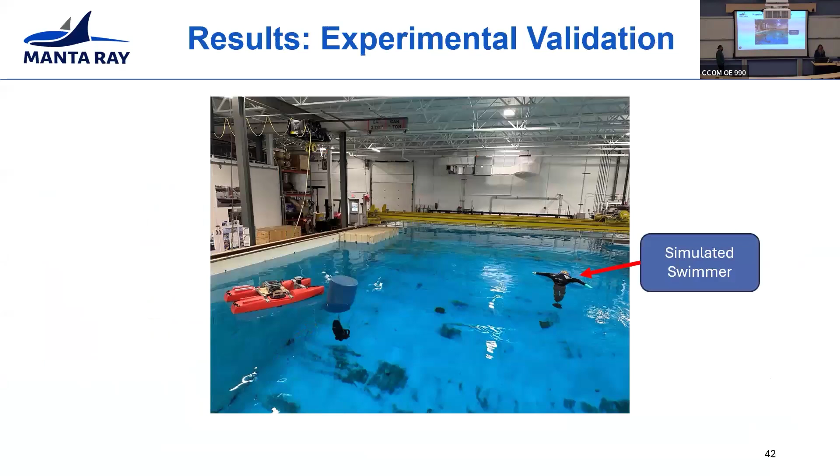In general, John, I assume related to you based on the last name, says PID adjustments, AOA, underwater drone, love it. As an experienced open water scuba diver, definitely appreciates the whale for locating people in open water. Exactly.

So with the future, but using a bunch of different sensors, do you have to worry about the field of view? Something like that, a smaller cone than something like a 360 degree. Yeah, so that's gonna have to be a consideration, especially when we start taking in the different viewpoints, because if you're looking at it from, say, in the optics community, like mosaicing, where you take those different viewpoints, you're gonna have to make sure that whatever you're actually sensing is the same across that. So that's going to really start mattering when we're looking at that information there. So having that spatial view is going to be necessary.

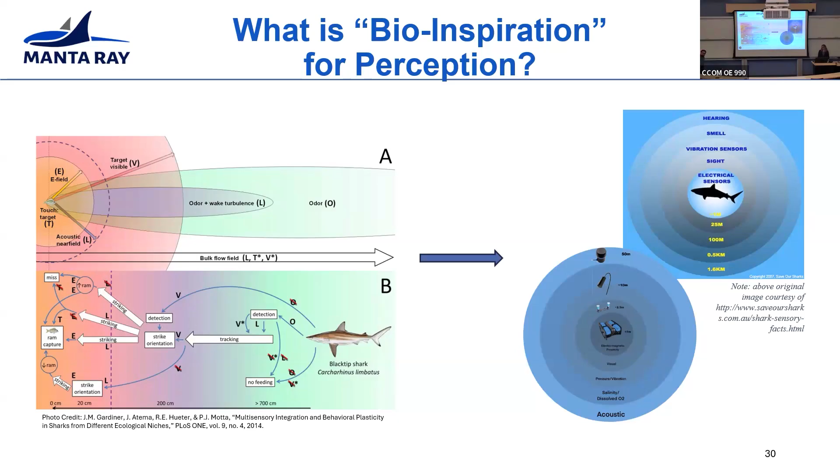Can I step in on that? It was fundamentally developed by a marine biologist and undergraduate, and we tested some of that, and mechanically it just was not efficient, and so we efficientized. So it was an evolution of things. But that's a fair question.